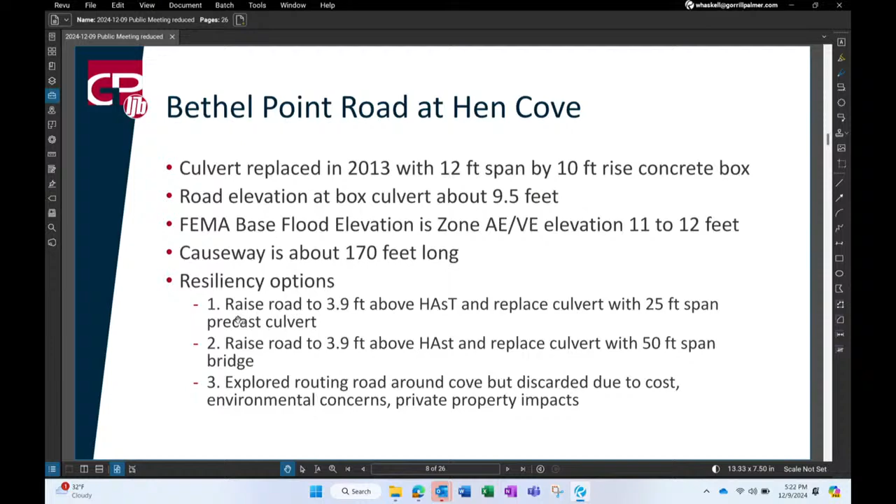So here's the current flood map. I wanted to bring this up so you can see the road, though it's hard to make out - it essentially comes down and crosses over the cove here. Hen Cove Road comes off right here, Sage Road, a private road, is up here, just trying to orient you to everything. Little Ponds Road is right here, and the ocean is down in this direction.

So what we see on this map is this VE zone, elevation 12, which I mentioned, basically falls in between these white lines I'm outlining with my cursor. These maps are very interesting because on this side of the white line, it's elevation 14. Just a little description of FEMA maps: VE is a velocity zone, where you'll see waves impacting the base flood elevation. As you move in closer to shore, usually that elevation drops because you're getting more friction for the water as it comes in, and those waves aren't breaking as high.

Over the bridge, or over the culvert, the elevation of the base flood is elevation 12, and as I said, the road is 9.5. So you've got waves basically breaking over the top of the road in that case. As you get into the little cove on the other side, that elevation changes - it's not so much driven by waves at that point, it's more quiet, just elevation of water, so that drops down to elevation 11 there.

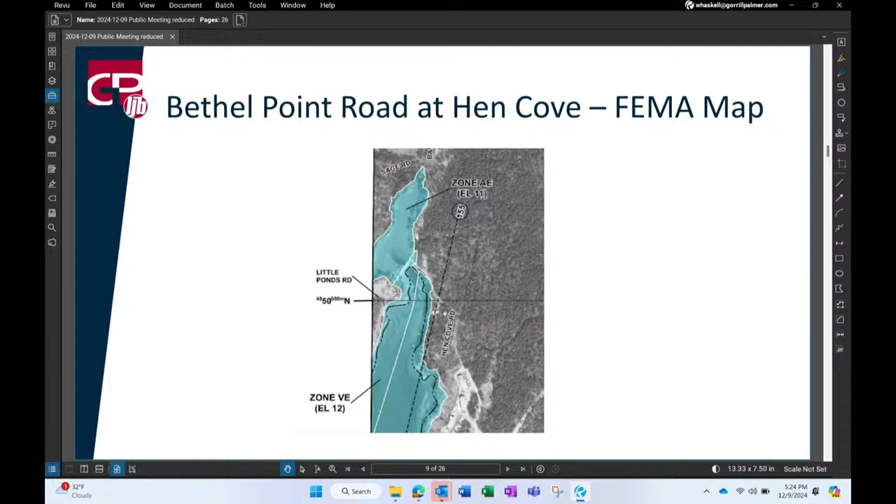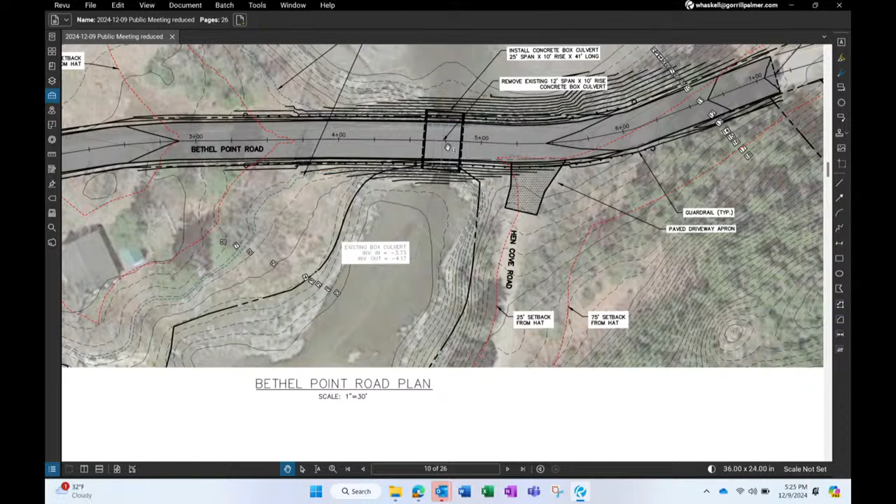So let's zoom in here. In terms of orientation of the map, the road basically comes in Hen Cove Road here. We cross over, the culvert's located here, and then this heads down towards the dead end of Bethel Point Road. What we're showing here is that we would need to reconstruct roughly about 580 feet of roadway.

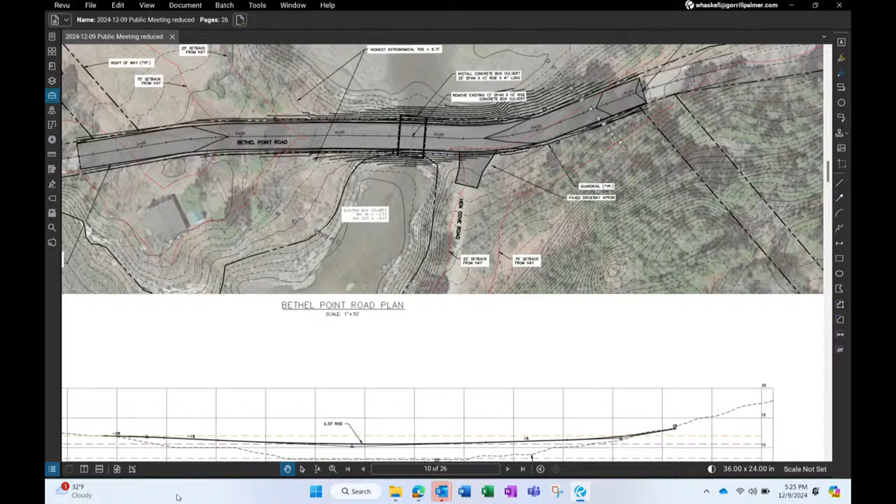To raise this road up by about 4 feet. 4 feet isn't going to get us exactly to the FEMA flood elevation, it's still a little bit shy of that. But it would raise the road about 2.3 feet at the low spot, 2.33 feet higher than what it is today.

We can do an infinite number of options here in terms of raising this road. We picked 3.9 feet just because that's what Maine Won't Wait has kind of been focusing on as an elevation. We could pick it up to the FEMA flood elevation if that's what everybody wants to do. It's just going to cost more money, and it's going to result in more environmental impact. That's going to cause more permitting and challenges with the regulatory agencies if we were just to go through and actually design and permit this project.

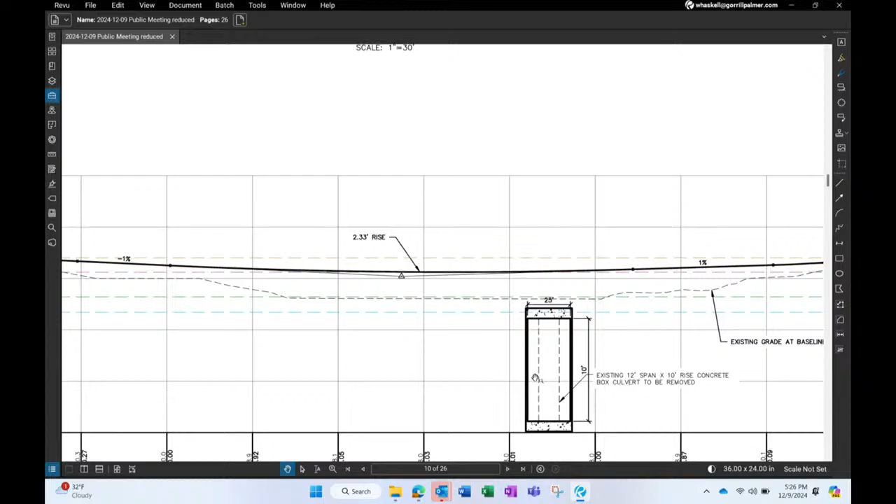One of the things we heard at the first public meeting, the kickoff meeting, I believe from the gentleman who lives at this property here, was concerns about whether the existing culvert is big enough to handle the flow. Well, it definitely isn't in terms of storm surge.

So there are a couple things you can do. One thing is you can go and build a bridge from one side to the other, spanning this whole thing. I think cost-wise, that's probably not going to be a feasible option. So we looked at a couple interim options. One is putting in a 25-foot span, so essentially more than doubling the span of the existing culvert.

And then we did another option where we looked at a 50-foot bridge, so basically spanning the pinch point, if you will. We're not going from one side all the way over to the other side, but we looked at a 50-foot span in there. There would have to be more hydraulic modeling done to look at the impacts of those and to see how much those two different options are going to improve the hydraulics and the flow through there.

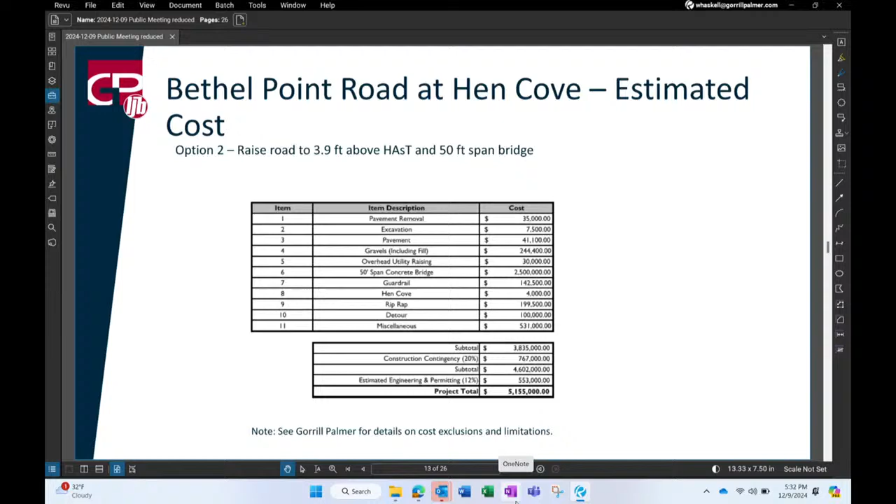What is the FEMA level again? The FEMA flood elevation here is 12. And we're getting up to, let me go back to my plan. We're basically getting up to 10.6-ish, so we're about 1.5 feet still below the FEMA flood elevation. It depends on which side of the road you're looking at, though. On the other side, it's 11, so we're about 0.4 feet away from that one.

If I might say something here, I think this is a high-level engineering analysis, but it does give the town an idea of when they're planning and ready to move ahead with the project. We would then go out for an engineering design and build, which would give more exact figures. But this is a planning tool we're using, looking out the next 20 years or so to see where we'll have to concentrate our resources. And these numbers are this year's numbers too, not projected out, because we don't know how far out the town is.

If the town is ever going to pull the trigger on a project like this. So when we discussed this project at the last meeting, another issue was brought up, and that was there was also flooding about maybe 200 yards down from the bridge, where the creek from the marsh comes and crosses a culvert underneath Bethel Point Road to go into Swamp Cove there.

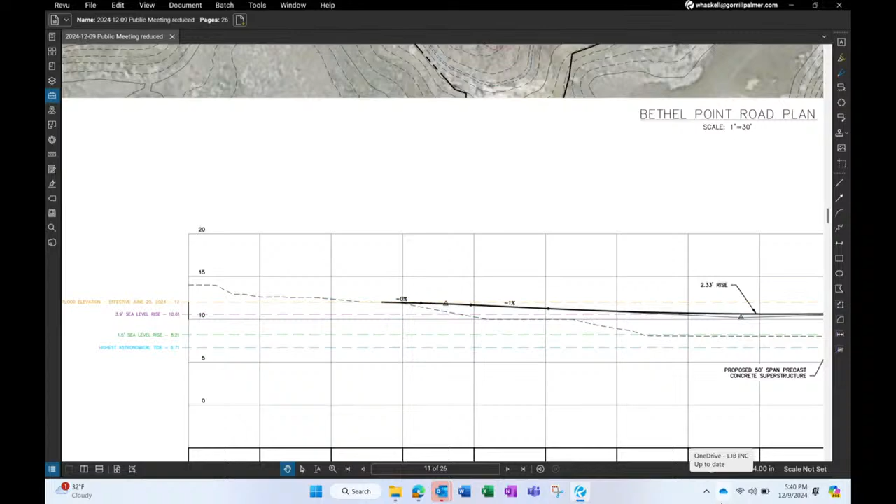How did you come up with the 2.33-foot rise rather than the FEMA elevation? So it's basically 3.9 feet above this highest astronomical tide line. That's where that came from, and it was really all about just tying it to that Maine Won't Wait guidance. We can pick anything we want, it's just at some point you have to decide how many of these scenarios you're going to look at. We initially started looking at 1.5 feet, but 1.5 feet puts you right at what the current road elevation is. So we said, well, we'll at least go to 3.9.

But we could easily do a cost estimate for going up to elevation 12 as well. And it won't take that much effort to put together a cost estimate to go up to elevation 12, which is the FEMA base flood elevation.

The interesting thing too is when we started this, the new flood maps weren't active yet. We were still looking at the old flood maps. So probably back in January, when we met the first time, we may not have had that elevation 12 on here because I think we were using the old elevation, which was quite a bit lower. It might have been elevation 9, for example, or 10. So there's been a little bit of change over the course of the project here.

Yeah, those were the floodplain maps that the town voted on in June, I believe it was, June of 2024, and we are now using those. At Abner Point Road, if you didn't go with the revised map that the town had another consultant look at, the elevation for the original FEMA flood map was significantly higher. It was like elevation 21 or something like that, and it was just like, you can't raise the road high enough to get up to that elevation.

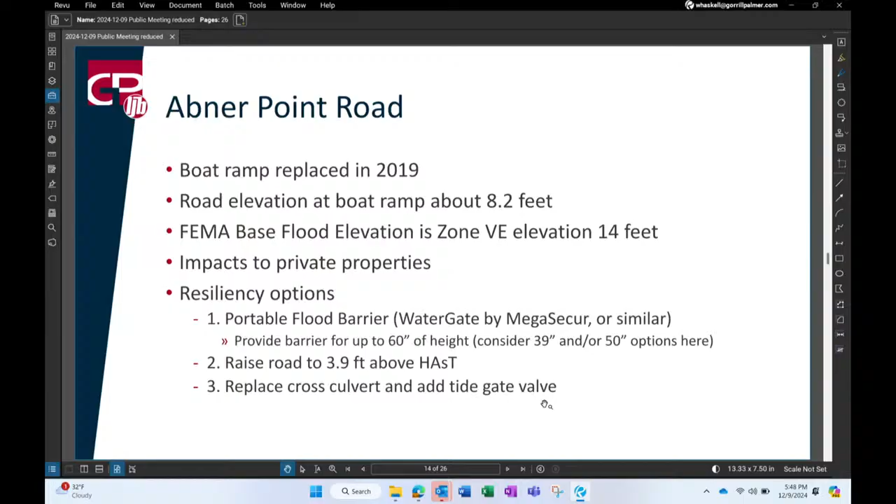We can put in what's called a tide gate valve. There's a couple different types of tide gate valves—I'll show you some pictures. Basically, it's a check valve essentially, and it keeps the water from backflowing through that culvert. It will at least give a little more time, or prevent that water from backflowing through there and flooding out the other side of the road for a little bit longer if you put that piece of infrastructure in place. So it's a relatively simple solution that doesn't solve the problem by any means, but it may deal with some of the lower level events that might occur and keep that from flooding on the other side.

So we've got some information on all three of these, so I'll keep going here.

Again, this is the flood map—just wanted to show that to everybody. So here's Abner Point Road coming around the head of the cove. Again, a lot of different lines here. Out in this area, the VE zone elevation is 17. Over here, it's 21. In here, which is what basically impacts most of Abner Point Road, is VE elevation 14, a little bit higher than Bethel Point Road. And then as you can see on the other side, it changes.

This AO depth 3 seems a little bit odd to me—I have to look at that. But we have the VE zone over here that's 13 that comes up into that wetland. So you can kind of see that wetland does, as I said, a good job of dampening out those surges from the other side.

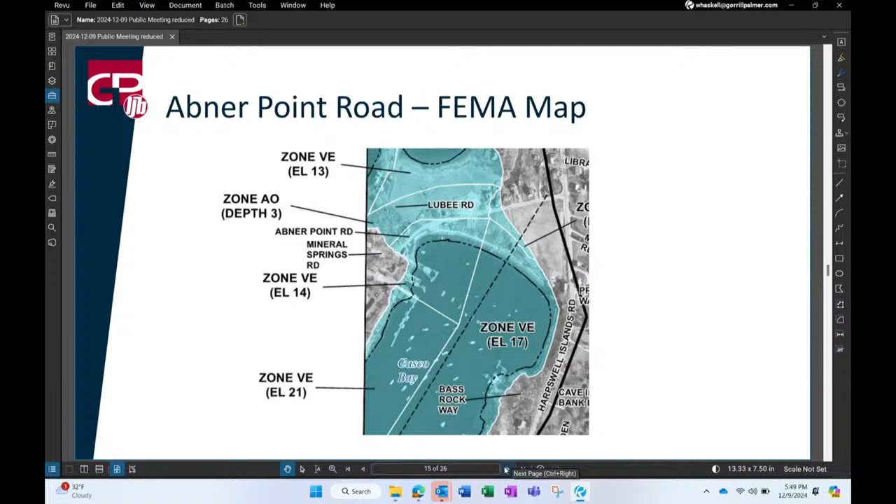So these are a couple tide gate options. I wanted to show you this product here, it's actually rubber, I call them a duckbill. It's called a TideFlex valve. It gets attached onto the end of the pipe. This curved piece at the end has a slit, so when water backs up and builds up on the upstream side, it forces that duckbill out straight, and the water flows out through the end. But it prevents water from coming back in. So you would put this on the Mackerel Cove side of the culvert, and it would prevent water from Mackerel Cove from backing up through that culvert to the Lubee Road side of the road.

How resilient are these mechanisms to debris? So this actually works really well with debris. Debris really doesn't impact it too much. I guess if you had a huge mass of seaweed or something build up here, it might impact it a little bit, which I know there is a lot of seaweed that builds up over there. There's a couple things we could do for that, which might increase the cost a little bit, to kind of prevent the debris buildup.

So we've had very good luck with these. They come in all sizes - I mentioned an 82-inch diameter one, but you can get them as small as 3, 4, or 6 inches. They're used a lot in wastewater treatment plants to keep flow from going where it's not supposed to go, or flowing backwards through the system. There's a lot of debris and sediment in those types of systems, so they're designed to operate under pretty difficult situations.

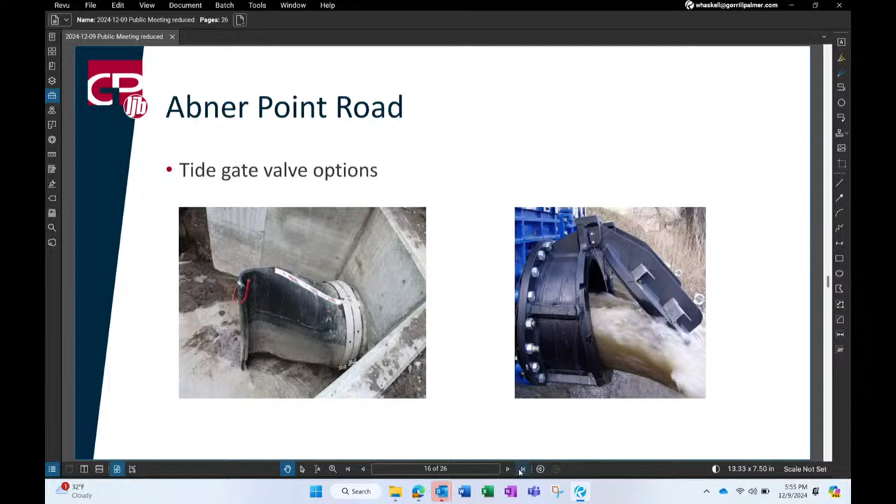So here's a few slides. We actually met virtually with the folks from this Water-Gate product. This just kind of shows how these products are delivered and rolled up. It's pretty straightforward. They've been in business for a number of years, since 1998. They're based up in Quebec. There are several other companies that do similar types of products.

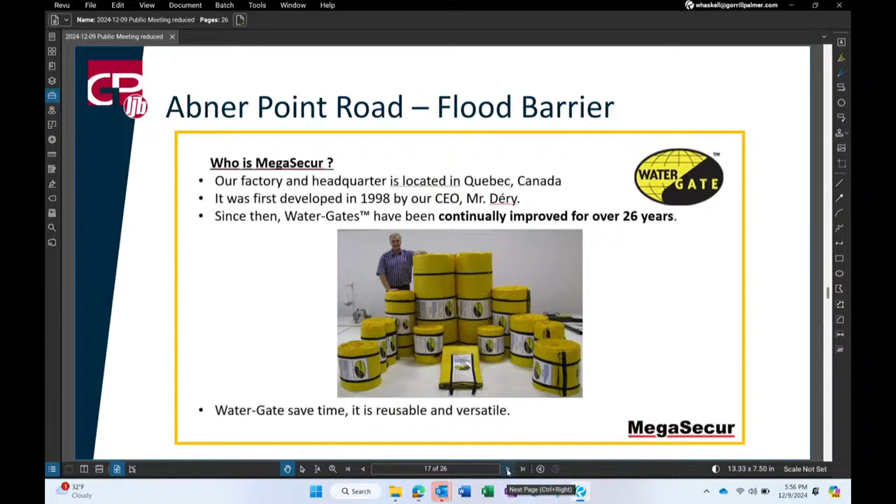So this picture here just shows how it comes rolled up like this. There's actually different types of crates and things. You can buy a specific trailer for these and basically drive it down the road and roll it out the back when deploying it. But you basically unroll it, unfold it, and it looks like this sitting on the ground, so the water would be coming in this direction. This is a weighted edge here.

It works pretty well over a wide variety of terrain. It doesn't necessarily have to be set on pavement or anything like that. You just can't have a log or something going underneath it that provides a gap for water to pass through.

Basically the water comes in, fills up these little scoops, if you will, and then this section raises up, and you can kind of see that in this image. I've got a video later on that I'll try and show you. But basically the water comes in and automatically floats this up, and this, depending on which size you buy, acts as the dam, the temporary dam in this case.

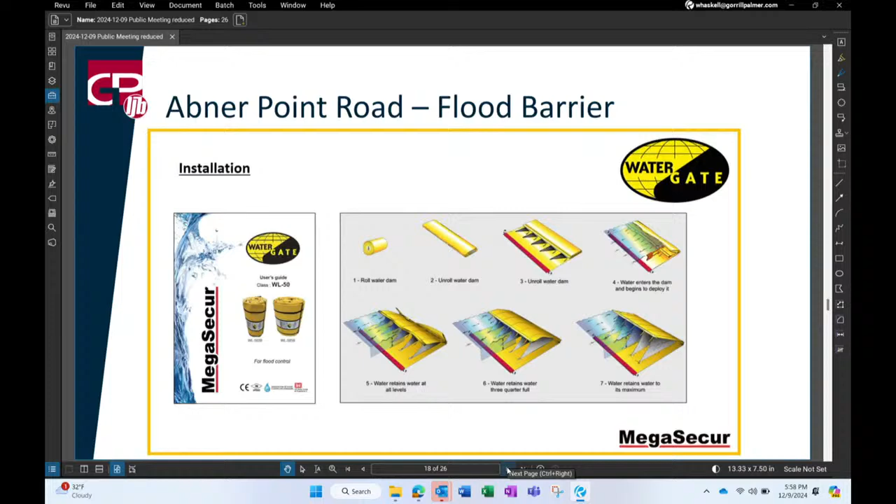This is a deployment crate, so you can buy it in these crates. We talked to the folks. In this case, we thought we'd need about 500 feet of this stuff. It would come in 3 crates, one with 200 feet and 2 with 150. Basically it would be loaded into the back of a truck, and you just pull this product out of the crate and lay it down on the road, unfold it, and then let the water do the work when it starts coming in.

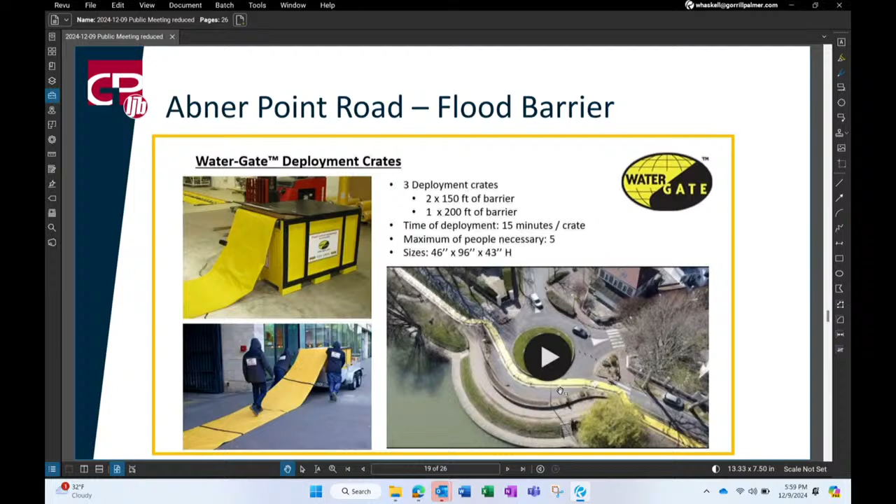You can see one of them here deployed. I think this is along a river, but it can have angles in it. It doesn't have to be in a perfectly straight line. They do them around houses, around buildings. They're used in all kinds of situations to prevent flooding.

The other thing is if for some reason it was deployed across a road, they have pictures of emergency vehicles driving over them when partially deployed. It doesn't really hurt them at all. They can drive up and over those things, and it doesn't do any damage.

When the water goes back down, that's probably the most challenging piece, because you've got to let it dry out, and then you've got to pack it back up and put it back in its crate. But hopefully it's not something that you need to do every day.

They say it can be deployed by as little as 2 people. Typically, 5 people would deploy something like this. And those deployment crates, a crate of 200 feet long, would typically take about 15 minutes to deploy. So you could deploy all 3 crates within 45 minutes or so.

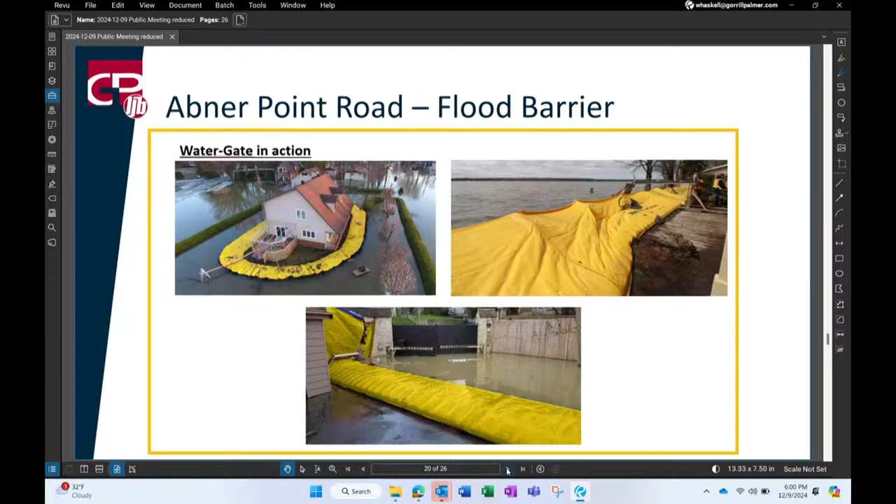So this is where I'm supposed to have a video. I'm going to wait till the end to show you the video, because I can't activate it here in this PDF that I have. But I guess I could go try. Let me see if I can get to my video here.

How does it do in windy situations? It's pretty heavy duty fabric, so if there's water in it, I don't think the wind's going to impact it at all. And when it's flat before the water comes, it's that really heavy fabric, I'm not really sure what they call it, but let me see if I can get this going here.

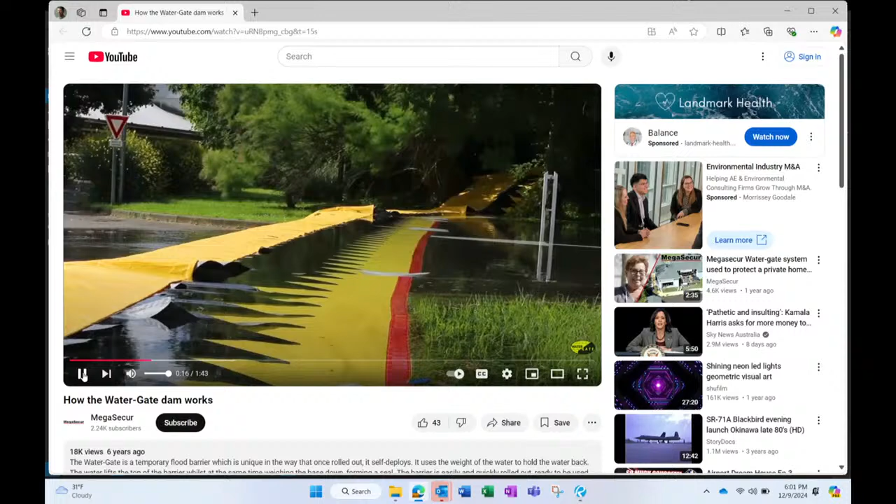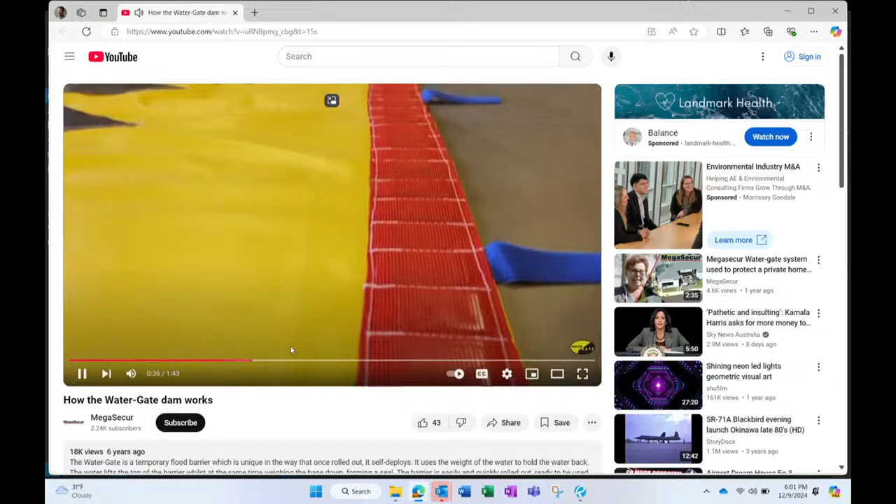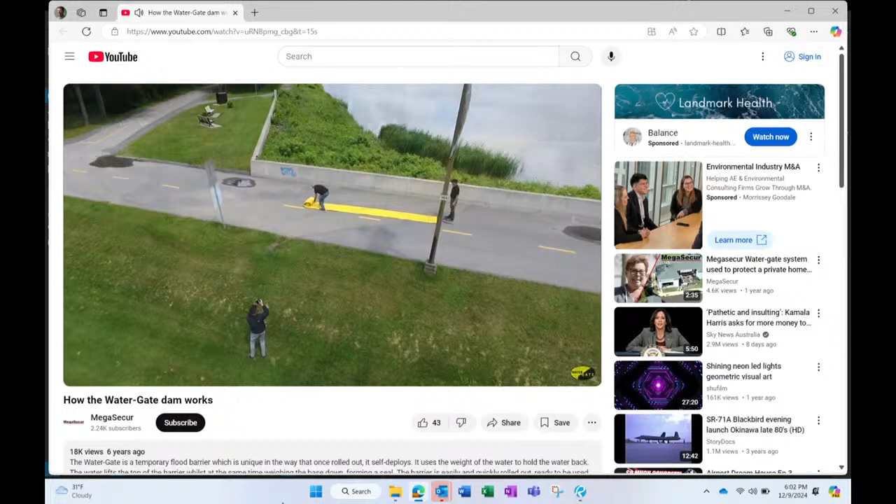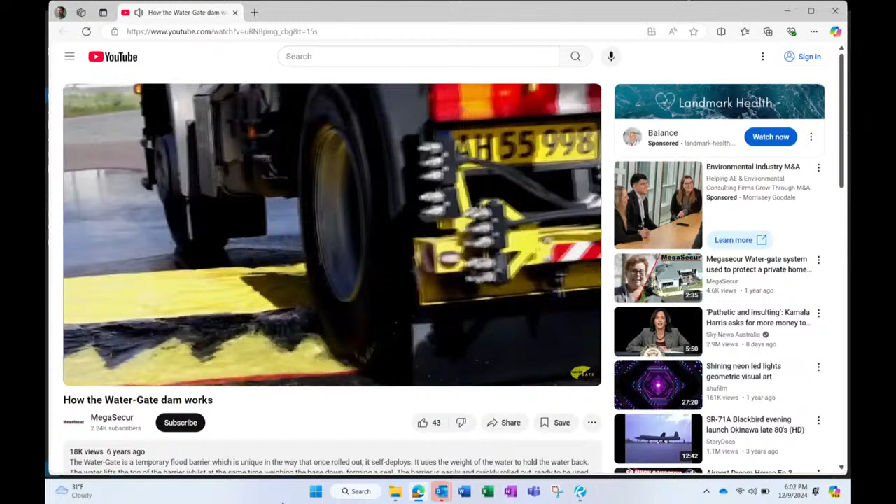By using this unique self-opening method, it reduces the time, effort, and number of people required to install it, making this a truly rapid flood or water diversion barrier. The WL Series Water-Gate has a weighted front edge which holds the barrier in place and helps prevent water from leaking underneath. The barrier uses a type of stitching called lock stitch. A broken stitch will not compromise the remaining stitches. The barrier is easily and quickly rolled out, ready to be used. It is very versatile and can adapt to different environments. The Water-Gate can be driven over thanks to its flexibility. It is highly portable and takes up barely any storage space. The barrier can be transported in a vehicle or truck to the designated site.

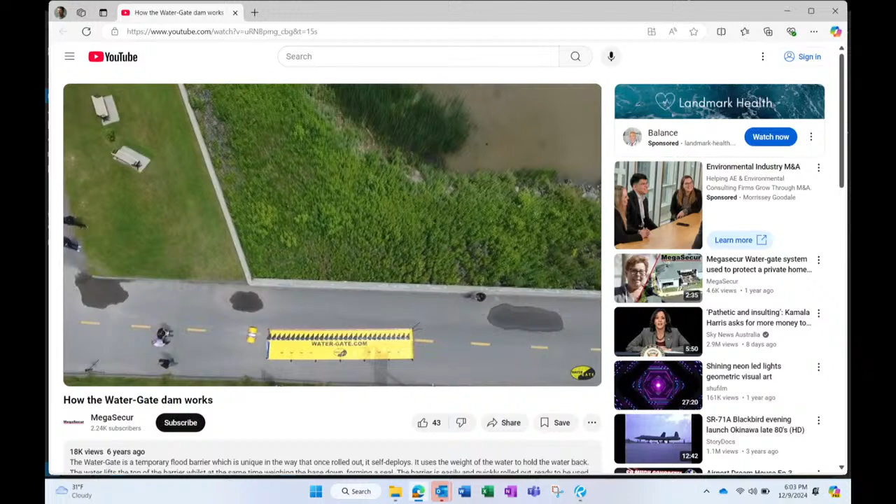What's the height of water that can be absorbed? You can get these up to 60 inch, 5 feet. At Abner Point, we were looking at 50 inch, just over 4 feet. Down in the low spot, near the boat ramp, about 100 feet of 50 inch, then about 400 feet, 200 feet on either end, of 39 inch, the next height down. I think there's one below 39, then you've got 39, 50, and 60. So those are your options.

There are other companies out there we haven't looked at. We were just trying to present one option here. There are other types of these things too that are more plastic, L-shaped barriers that link together, and you build them similar to this. But I like the automatic kind, where as the water comes in it fills up and then goes back down, and the ease of deploying it, rolling it out versus trying to fit these things together.

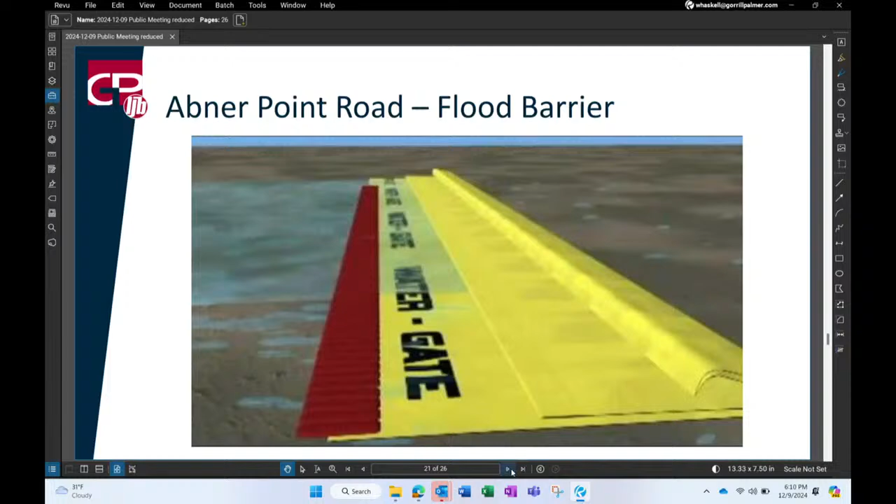What are the cost comparisons between purchasing and deploying something like that versus raising the road? It's coming next—well, not quite next, but I'll get to it in a second.

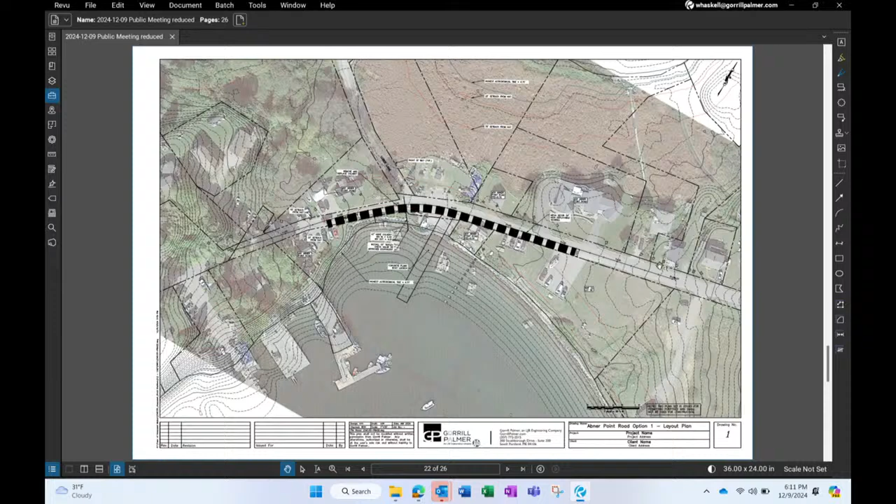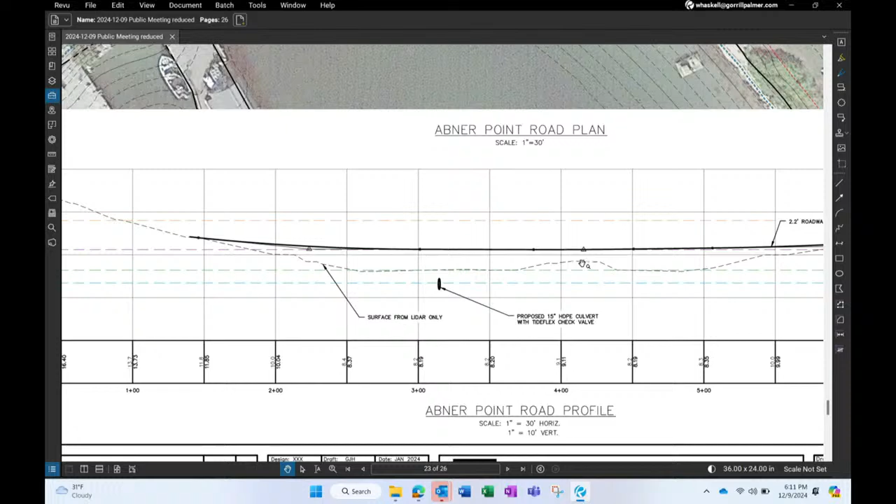So this is the raising-the-road option. Again, we're looking at 3.9 feet above highest annual tide, which roughly raises it about 2.2 feet in this case from the existing road. There's a little bit of a weird hump in the road here, and then the FEMA flood elevation here is much higher than that.

In my opinion—well, I guess with enough money and everything else, you can do anything you want—I think it would be very difficult to raise the road to the FEMA flood elevation in this location. It's less difficult over at Bethel Point Road because you have less impact to private property and things like that on either side.

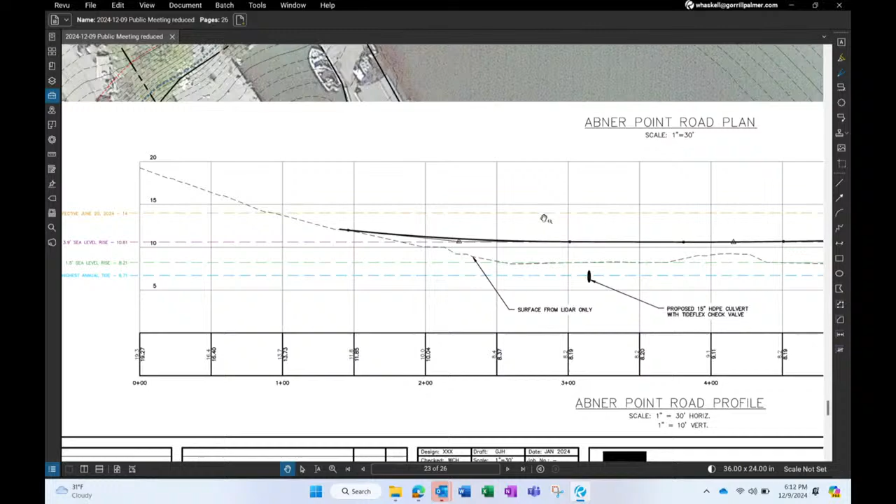If you asked me what's the cost to raise the road to elevation 14 at Abner Point Road, I can come up with a cost, I guess, but it's so challenging with some of the existing private property—these two structures here, this house here. I think the boat ramp becomes much more of a challenge.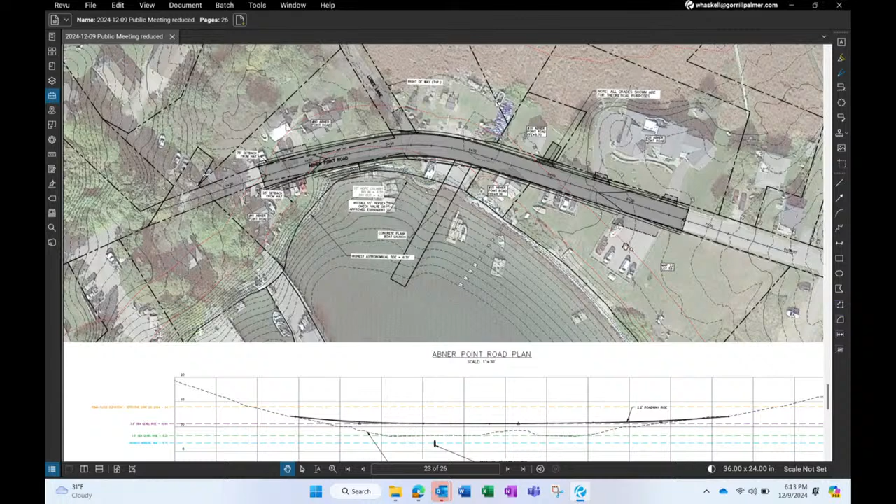Let me see here—come on, there we go. So this is the portable flood barrier and the tide gate.

For the flood barrier, I think this is a conservative cost—this is actually looking at the 50-inch barrier for the entire 500 feet here. TideFlex valve, miscellaneous costs—I think we'd replace the culvert while we're in there. So, $329,000 total project cost. That includes a contingency, not on the flood barrier, but on the tide flex and miscellaneous and engineering costs.

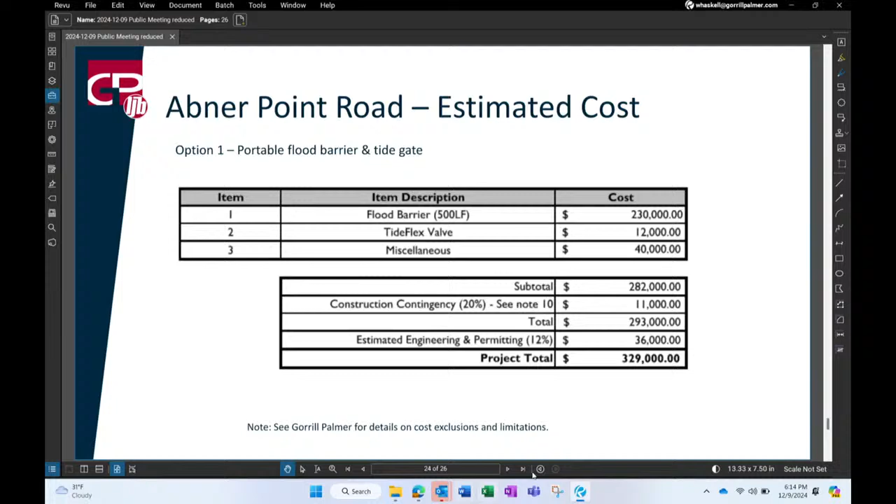So, 329 versus 1.5 million. This is a little bit lower than the other ones on Bethel Point because we're not replacing a massive culvert like we were over there—that culvert adds a huge amount of cost to that project.

So still not insignificant, but the other thing this doesn't deal with is the ancillary costs of the private properties affected by raising this road. We're reconnecting driveways where there are existing driveways, but we're not raising structures and all of that. So there's a lot of other costs that would likely occur, and the town would need to decide how they want to deal with that. If it's being caused by a town project, I don't know all the answers in terms of the private property owners, because now all of a sudden your road's 2-3 feet higher than the structures on either side.

I know there's been discussion, I've met with one of the property owners to talk about their properties and the two structures next to the boat ramp. I know they would like to just raise their entire lots and raise the houses that way. Based on my knowledge and experience with permitting and regulatory agencies, I don't think that's feasible. I think if they want to raise their structures, they're going to have to raise them up on piers. So it wouldn't be raising the elevation of the lot or the ground of the lot, you'd just be raising the structure up in the air. I'm involved with several similar projects further south that we're looking at right now down in Biddeford and other locations where they're basically raising their houses up on posts.

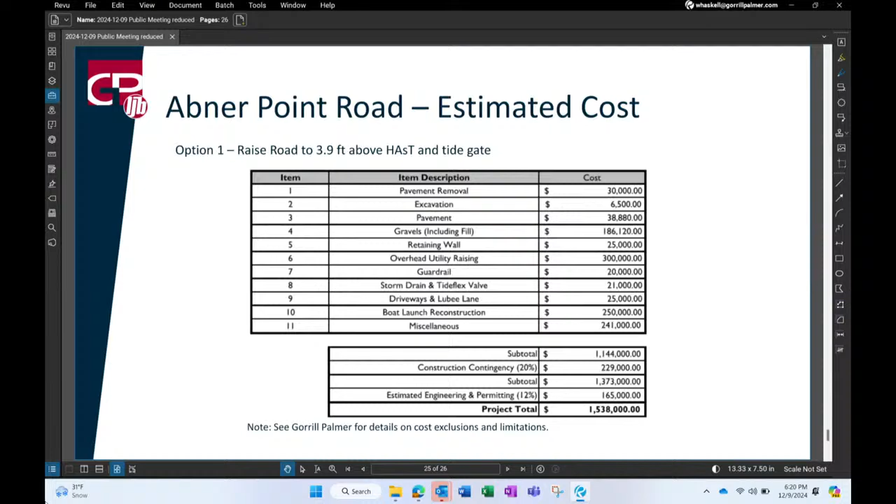Based on the recent past with weather, if you were to go with the portable flood barrier and the tide gate valve option, how many times a year would that likely have been used? More each year, potentially. Most recent data, yeah, I'd say 2 to 3 times maybe this past year.

And the life of those systems, you're saying, is 20-plus years? Yeah, as long as they're treated well, and you're not just throwing it over onto the side of the road until the next one and then pulling it back. If you pack it up, dry it out, and pack it into its crate, then deploy it again the next time, I think you'd probably get 20 years plus out of that type of system.

There'd have to be some operating costs, you can't just have this thing appear. There's probably some training, too. They make it sound like it's easy to deploy, but my guess is you've got to have the people there to deploy it when it needs to be deployed. It's not like we have a full public works crew here in town, though some towns do have one that could potentially be responsible for that. There would have to be consideration of that for sure.